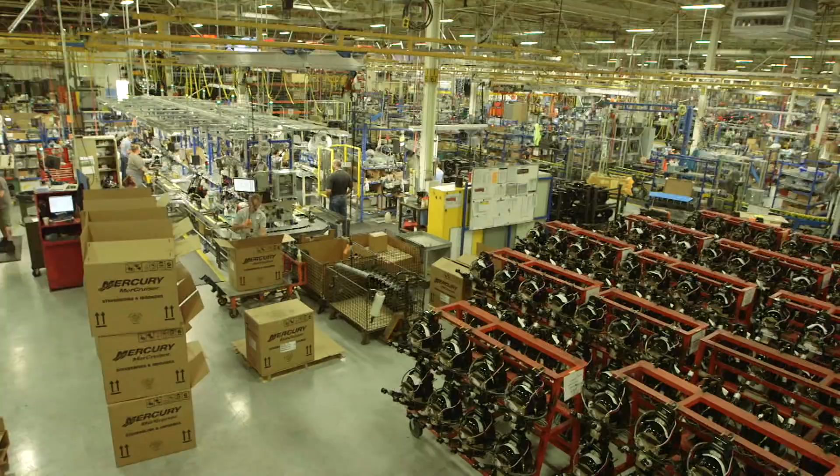This week on Titans, right here in Wisconsin, America. Boom! Mercury Marine.

1939. Just go somewhere and buy it. You don't even realize how it's made. It will help us out a lot in our own shop.

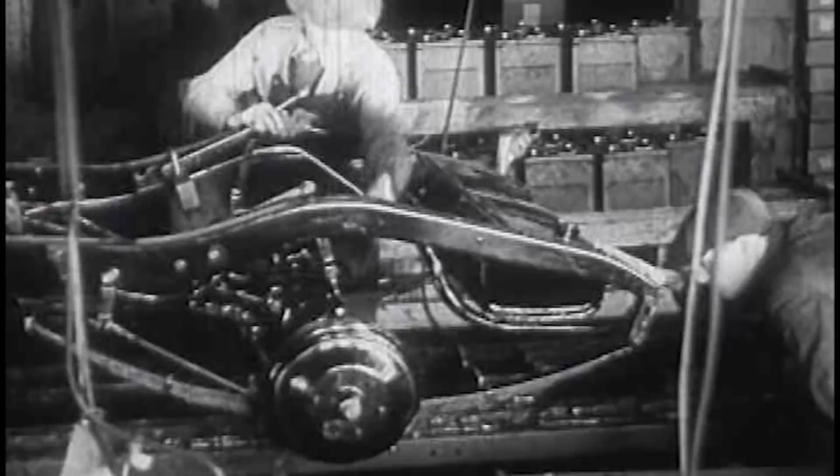I pledge allegiance to the flag of the United States of America. But today, we've seen millions of jobs lost, and 100,000 manufacturing plants have been closed. And to the republic for which it stands. Join us as we take a stand for American manufacturing and fight to bring those jobs back home. One nation, one nation, one nation. Under God, under God, under God, indivisible, with liberty and justice for all.

This industry is hidden from the general public, locked behind closed doors. Today, all of that changes.

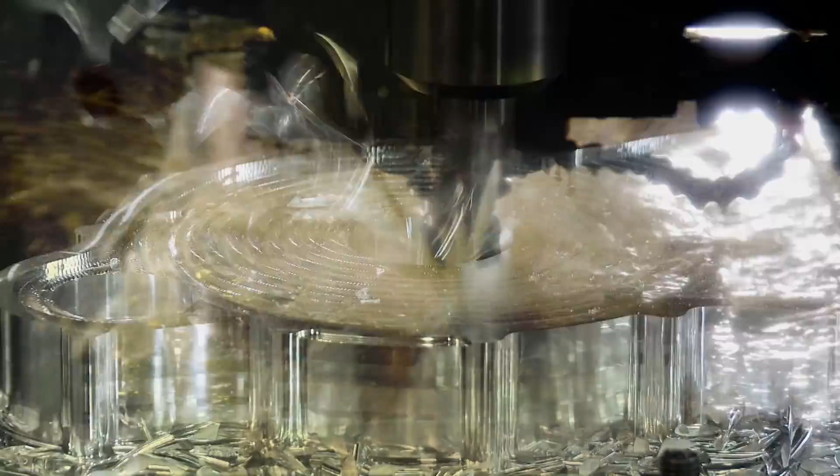Every week on Titans, we're going to show you great American companies that are manufacturing and doing it big right here in America. We're going to teach advanced manufacturing techniques, and we're going to clearly show you how to bring work back to our shores. It's time to put Americans back to work.

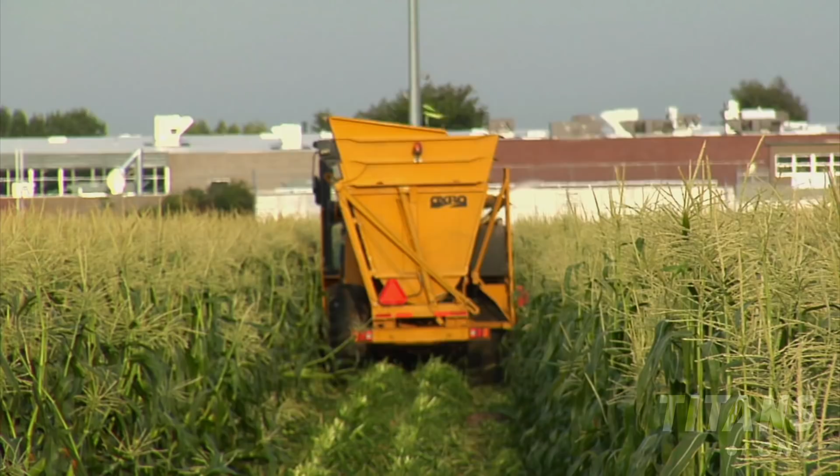We're back. Boom! Right here back in Wisconsin. Last year in the first season, we came down to Eleva-Strum to showcase this amazing high school.

I think that you guys are such a prime example. A small school that doesn't have the funding, so you guys thought outside the box, created a business. It's all about providing the students with a relevant, real-life education, problem-solving, real deadlines, real customers, real concerns, real money.

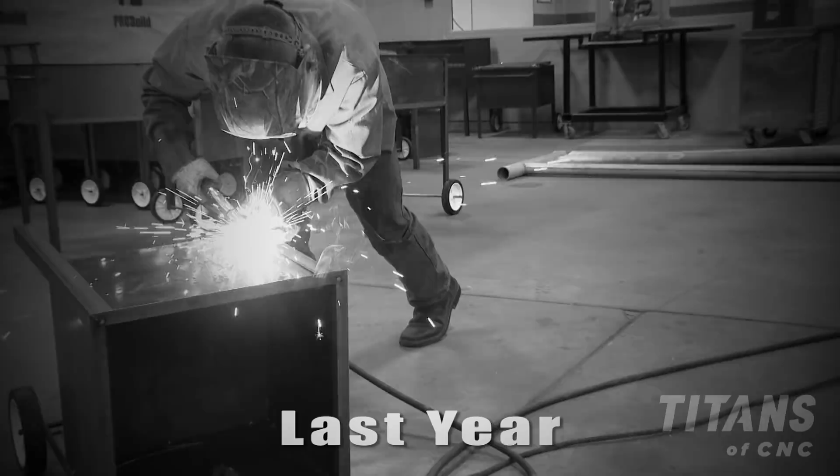These guys are working like they're at a job, but they're getting educated at the same time. They've already got what it takes to make it in the outside world. Eleva-Strum, right here in Wisconsin, in the great United States of America.

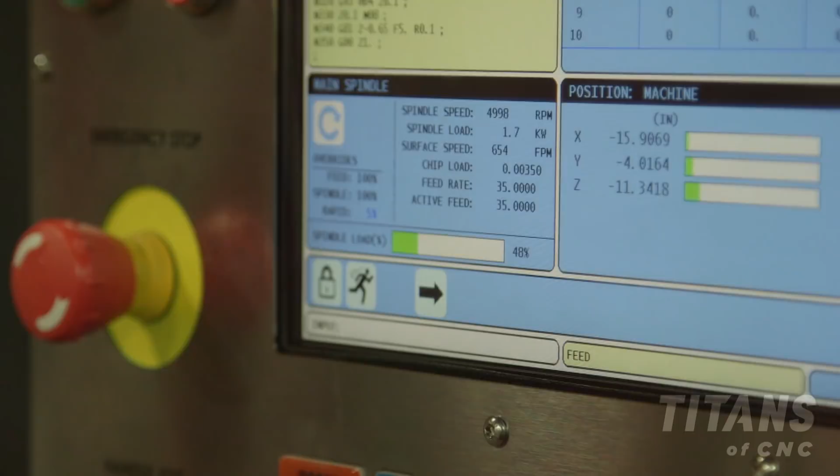And now, during our second season, there's a progression. They got new CNC machines on the floor. So I thought it would be fitting that I would just fly back to Wisconsin.

I would teach them a little bit about those CNC machines, and then we're taking a road trip down to Mercury Marine, 3 million square feet of advanced manufacturing. I'm gonna show the students how we manufacture on a huge level, thus showing the audience that it can happen and that it is happening right here in America. This is gonna be an amazing day.

Craig! Titan! Eleva-Strum! Good to see you, good to have you back. Man, it has been just about a year.

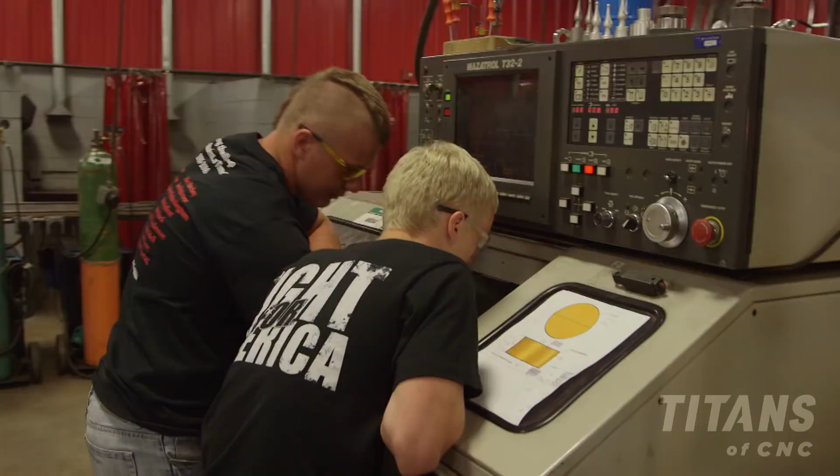Yeah, now you got big old CNC machines. New and improved. Since your show last time, this proton therapy place out of Chicago called us up, so they want us to do some parts. Right today, the students are in here making parts that are going to cure cancer. That's so good. And then we get other phone calls all the time, from schools or industry partners or people that want to implement a program like this into their school.

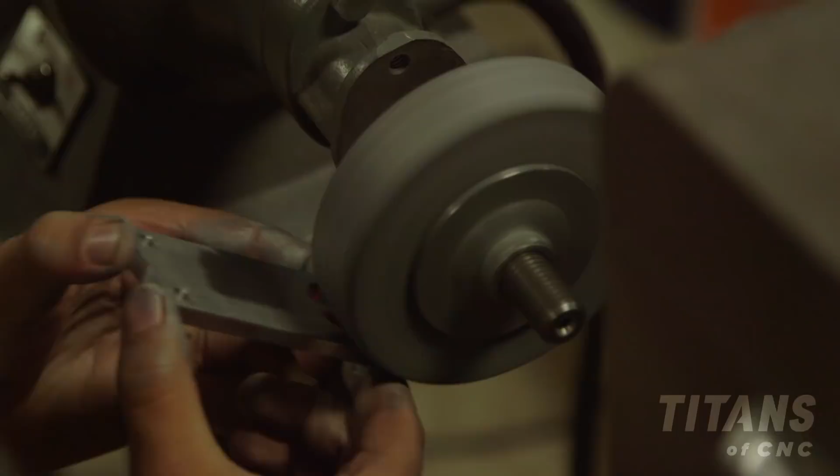So they're starting to call, come up, visit, tour. I got people contacting me all the time, and they want to talk about your school and your students. I'm just proud of you, proud of everything.

And now you got the Haas CNC machine, so we're gonna do a little teaching today, but then we're gonna go bigger. We're gonna put them on a bus, take them down to Mercury Marine, and show them what 3 million square feet of manufacturing looks like.

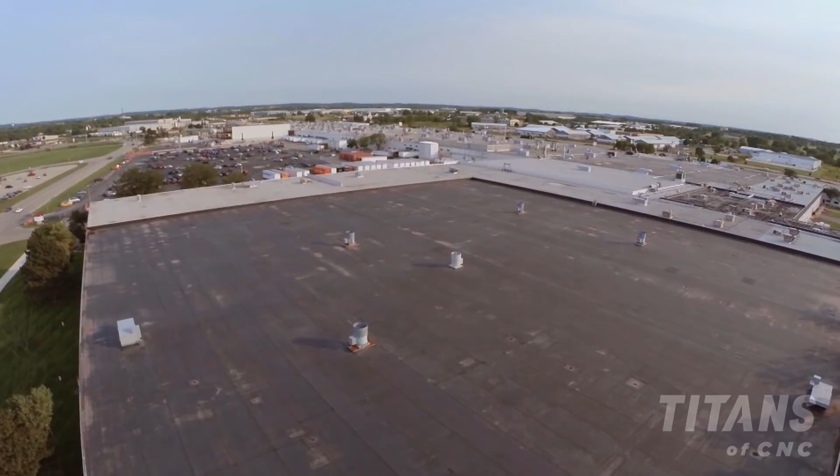That's gonna be awesome. Go meet my cousin and see what he's doing. Show me what's going on, man. Good to see you.

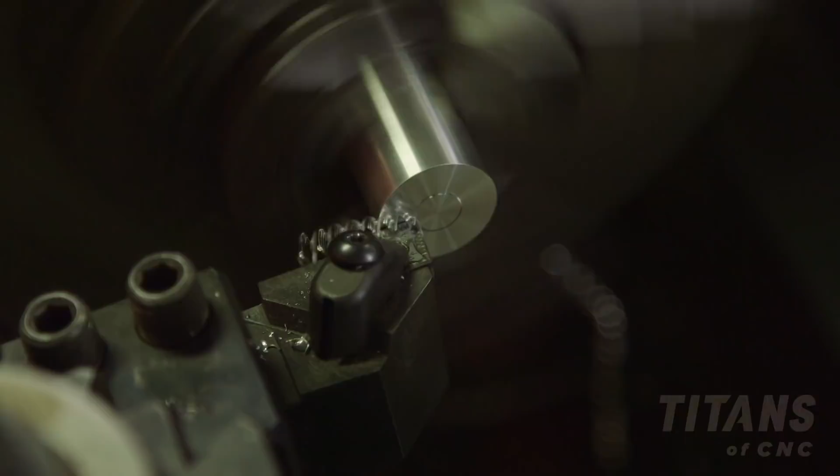Oh, I remember this guy. Hey, Titan, how are you, man? Good, how are you? Manufacturing, making some parts.

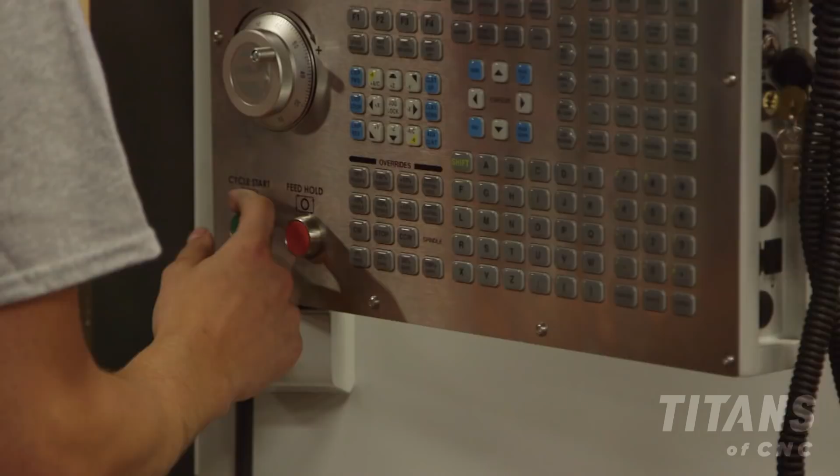Yeah, I've learned a lot since freshman year. I started Cardinal Manufacturing, and I've just progressed from there. So last time I saw you, you were on this exact machine. Yeah, I was. Do you ever get to go over to the CNCs, or how does it work? Yeah, I've been starting to learn on the CNC, but mostly I've been pulled back to here because we're so busy. I'm going to talk to you guys a little bit about the CNCs today, so hopefully I'll expand your mind a little bit to what's possible. Can't wait, right?

Good seeing you. Yeah, thanks for coming.

A lot of people jump into CNCs and they don't really understand the pressure, the tools, and all the fundamentals involved in manufacturing. Because when you come over here and program, you're almost separated from the machine a little bit.

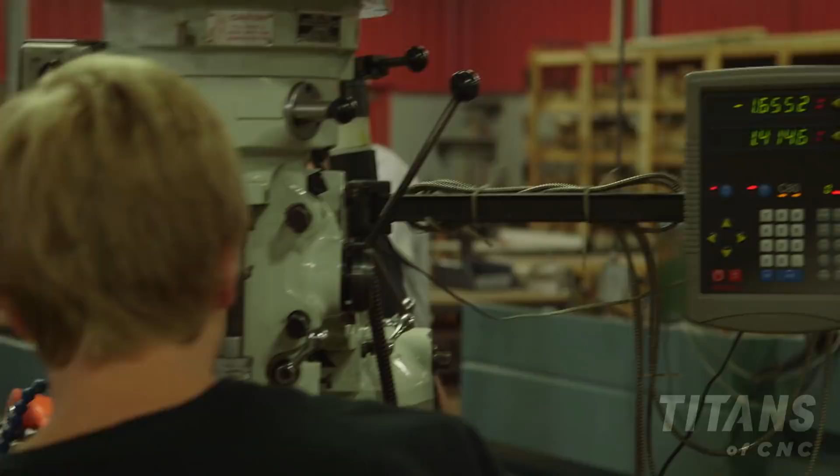Logan, I remember you got the California haircut. You wake up early, like an hour before you start getting ready, just to get that hair dialed? I'm just messing with you. How are you doing, man? Not bad, how are you?

I'm good. So what are you making? Making the pivot points for the grates on the chicken grills. We're gonna drill a 5/8 inch hole through here, and then put another piece of metal through here, and that's gonna pivot the tops and bottoms. Normally there'd be a faster way of doing this, but these grills gotta get done by Labor Day, so Logan's just gonna make a few parts, put a few holes in here, get it done, get them over to welding, put it together. And that's manufacturing.

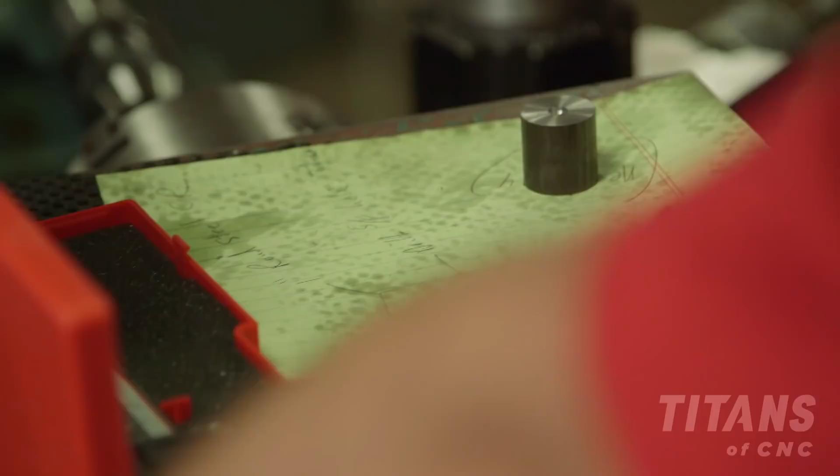We're gonna solve problems right now, get it out the door. American built, get it to our customers, make some chicken. Love it, man, good job.

We put tools in of various lengths. We bring them down and we zero them to the part that you're gonna machine. It doesn't know that there's a part there, it doesn't know that there's a vise there. All it knows is that when you dropped it down, it says -12 inches.

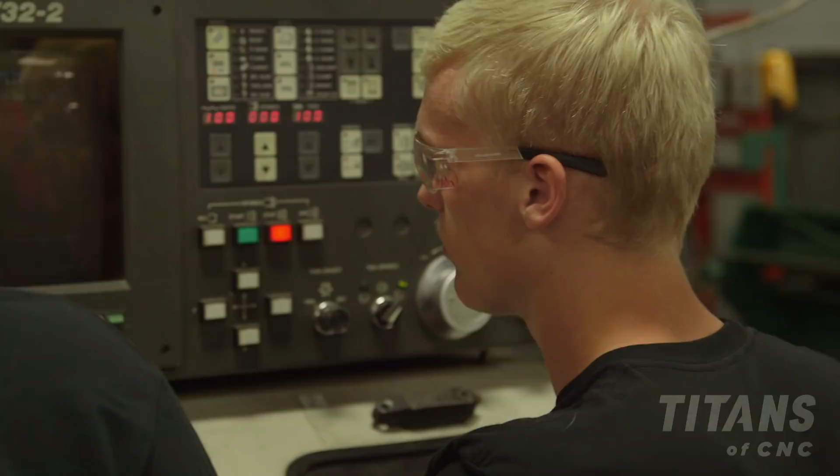What's up, guys? Good to see you again. How's it going? Oh, I love that shirt. Representing. You see that? Titan American built. Boom, oh, that's the part right there.

Since your show last time, this proton therapy place out of Chicago called us up, so they want us to do some parts. That is awesome. So you guys actually faced the first side, cut your jaws, flipped it over, now you're just decking the backside.

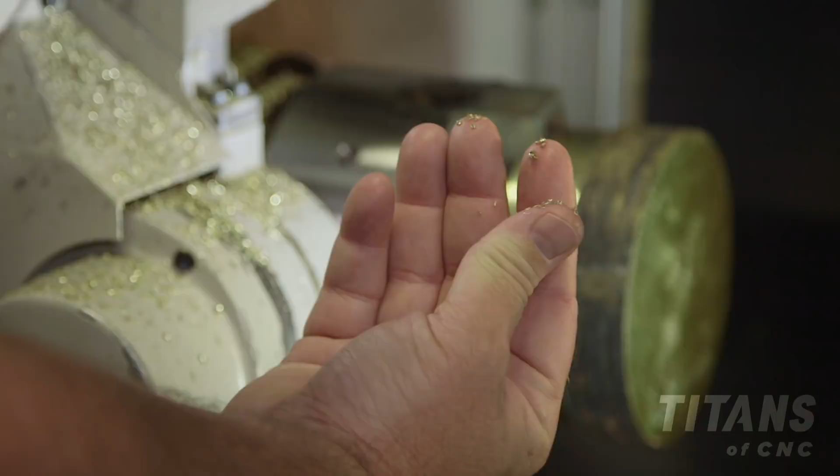So what is this, 360 brass? Yeah. They just send us the parts out of Chicago, they send the material up. We're machining, we're going to ship them back to them. This is the first time through, so we're just doing a short run of 5 parts.

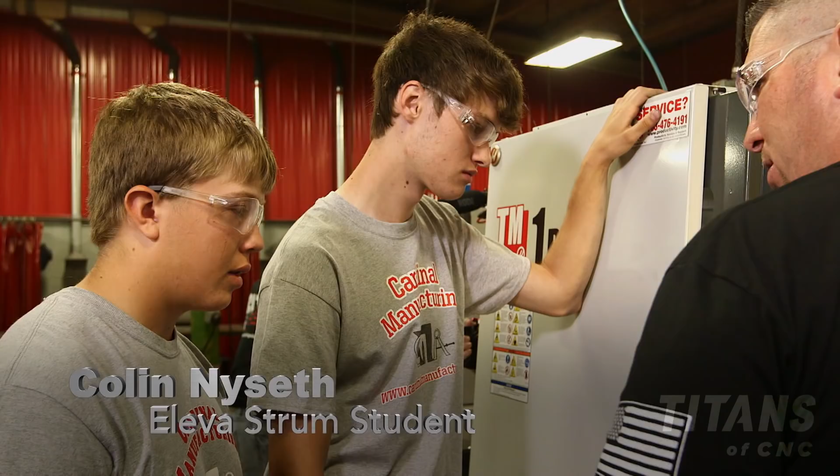Great job, guys. So I've been hanging out with Titan today, and he showed me that just by adjusting a few speeds and feeds, you can make your program go way smoother and faster. We just made a couple changes, speeds and feeds, how the approach was, and you got it down to 53, 54 seconds, right?

Yeah, it's kind of scary the first time watching it zip across there at a feed rate of 35, but after you see it go the first time and see that the tooling can actually handle it, it's really cool to think that we just took a minute off the program. And that just opened your mind to the possibilities, right? It's awesome.

I love it. I use Inventor HSM, and I just learned the drawing part of it last semester, and this semester I look forward to learning the cam part, so that way I can draw the parts, put them in cam, and then send it out to the machine.

There's a lot of different codes and stuff, but you should master it. You should have a cheat sheet of codes that are necessary, the necessary codes to memorize and be tested on before you touch one of these machines.

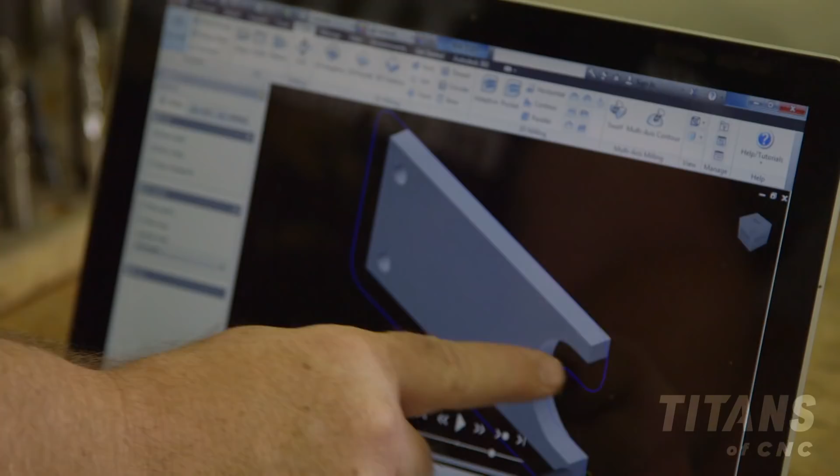All right, we just finished up over here at Eleva-Strum High School, and it was awesome. I got to talk to the kids, we worked on the CNCs, we worked on some CAD CAM, and now we're getting on a bus. We're gonna take a 3-hour drive down to Mercury Marine. Come on, it's gonna be awesome.

You guys ready to go? Ready. Come on, let's do this.

Next on Titan: 3 million square feet. I never would have thought machining was like this. Thousands of people coming to work every day.

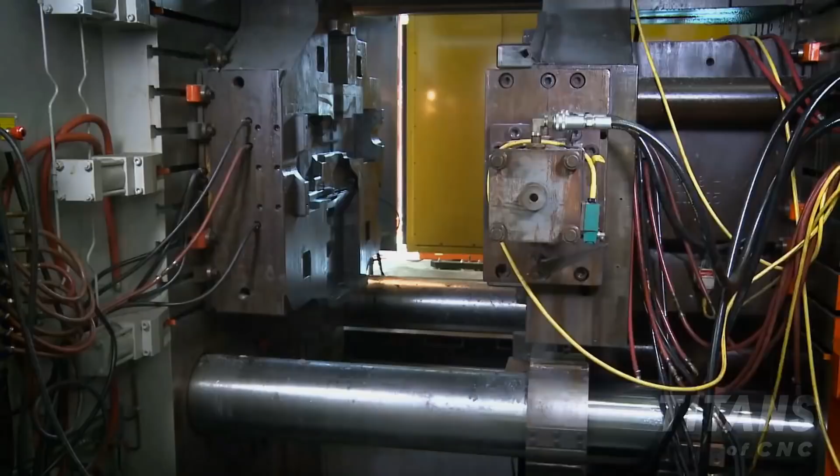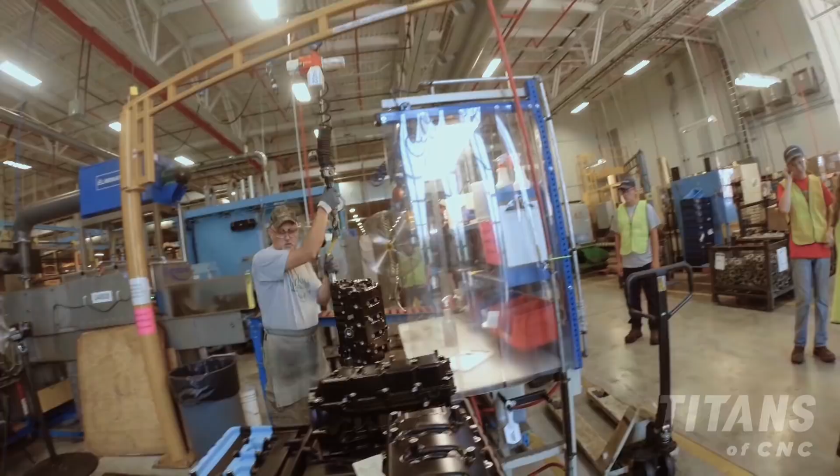We are here at Mercury Marine, Wisconsin. This is an amazing company, started way back in the 1930s. They have 5,300 employees and close to 3 million square feet of advanced manufacturing happening right here. We brought the students from Eleva-Strum down here to open their minds. Sometimes in life, seeing is believing. This is gonna be awesome. Let's go check it out.

Hi, I'm Jerry Sigelski. I've been with Mercury Marine now for about 10 years. Hey, good to see you. Welcome to Mercury. I started in the quality field in the machining area. Currently, I'm the general manager for the machining plants here in Fond du Lac, Wisconsin. Jerry. Titan. How are you? Good to see you. Great seeing you.

Hey, thank you so much for taking the time out of your busy day and helping to educate our students, the future of American manufacturing, the future of this great country, and just showing them what high-end manufacturing is all about. Hey, that's not a problem. We've been really looking forward to it, really excited about their program. We need young talent and young people in our workforce to take on the legacy that we've already created. Absolutely. So you guys have like 5,300 employees. 5,300 around the world, 3,100 of them are here in Fond du Lac, Wisconsin.

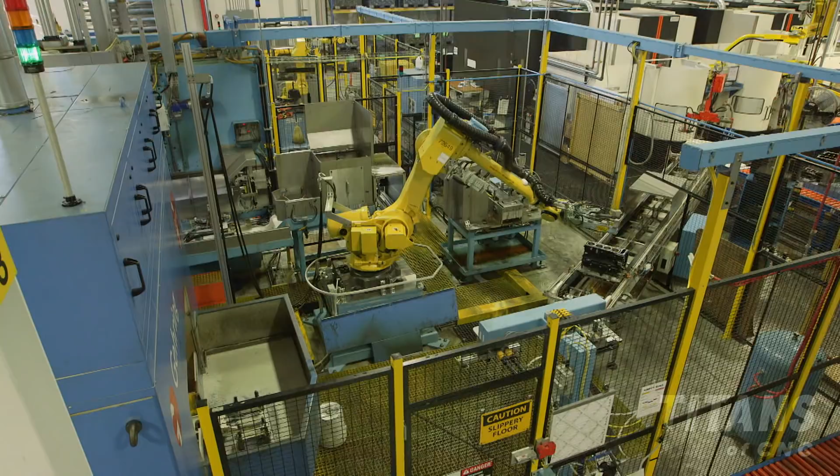Well, Jerry, this place is amazing. I know your automation, your machining, everything is on a huge level. You do everything in-house, and it's exciting. Our technical capabilities are second to none. I'm really excited to show you guys what we have to offer, so let's go take a look. It's gonna be awesome. I can't wait. You guys ready? Yeah! Yeah, let's do this.

We're in the midst of some pretty exciting times within manufacturing. Innovation has never been at a higher level. Bringing these kids in from Eleva-Strum is absolutely critical to our future and our future success, not only here in this area, but around the world.

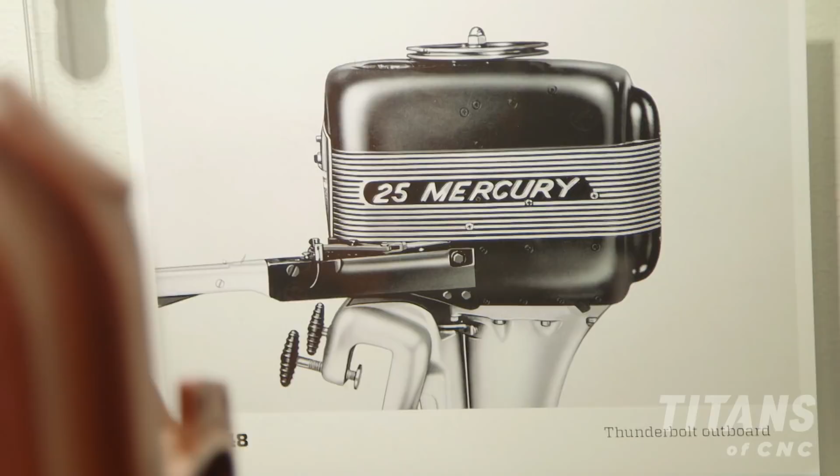Titan, I'd like to welcome you to Heritage Hall, a very special place for Mercury Marine. We have a pretty cool story to tell here in Fond du Lac, and I think this place really sums it all up. This really outlines the diversity of Mercury over the last 75 years that we've been in existence. That's crazy. 1939, the Thor. That's right. Love the name. And as you can see, as we go through our product family, the diversity that Mercury's brought to Fond du Lac in the area with chainsaws and other products, snowmobiles throughout the years has been outstanding.

So you guys really pay attention. When you look at the motors on the sides, look at where they started, and as years progress, how the technology changed, the design changed, it just gets better and better. Ooh, the big boys. Now we're into the super size. Yeah, so as you can see, the first 30 years, evolution and innovation seem to be very slow. However, the last 30 or 40 years, technology and innovation is growing at a rapid pace.

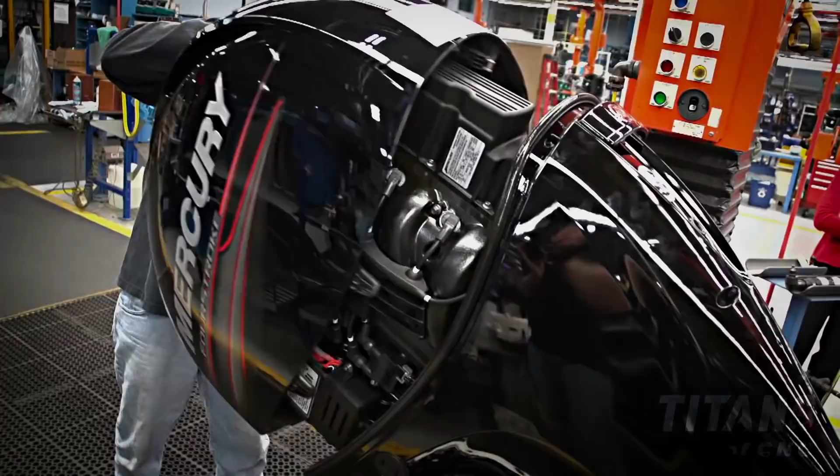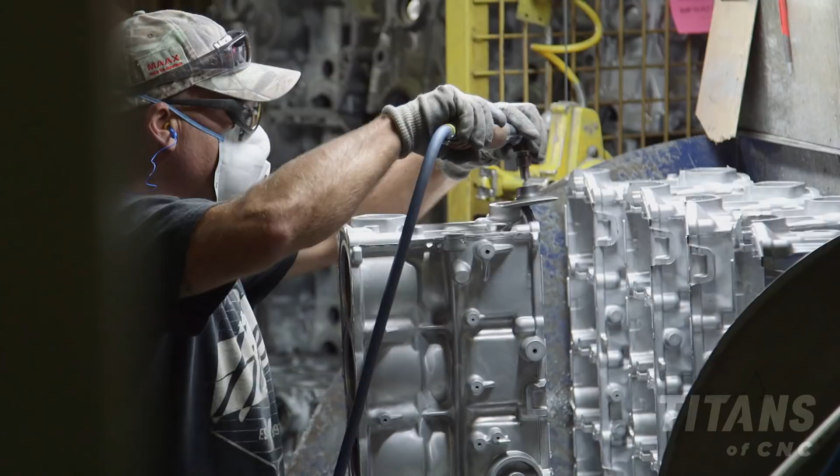So now that you've seen some of the end product, I'm gonna send you over to the foundry to meet Mike and Trevor. They're gonna take you from aluminum chips all the way to a finished product, and then we'll come in and see how it's done through the rest of the process. Machining, assembly, the whole works, right here in Wisconsin. Works of art being made. Absolutely. It's gonna be exciting. You guys ready? Yeah! Oh, boom! Yee! Let's go.

He has the tools, the equipment, and the know-how.

Trevor! Titan! Hey, it's great to see you. Likewise. Thank you very much for taking time out of your day to help educate the future of America on American manufacturing. Well, welcome to Mercury Marine's Plant 17. Plant 17, we are our own foundry.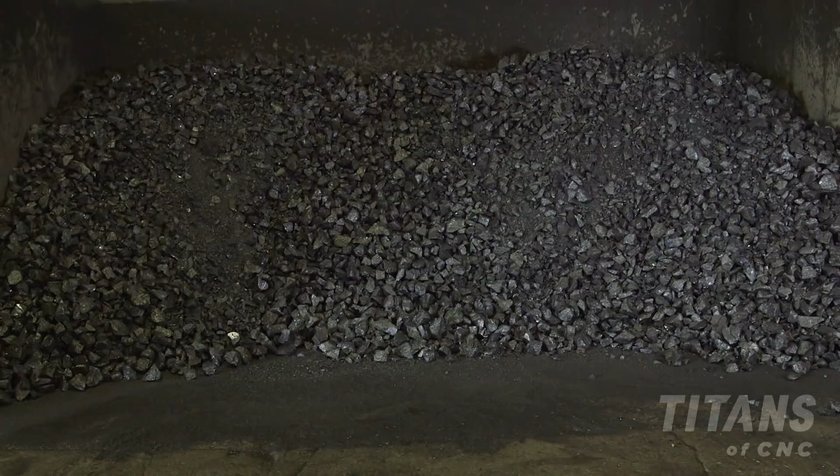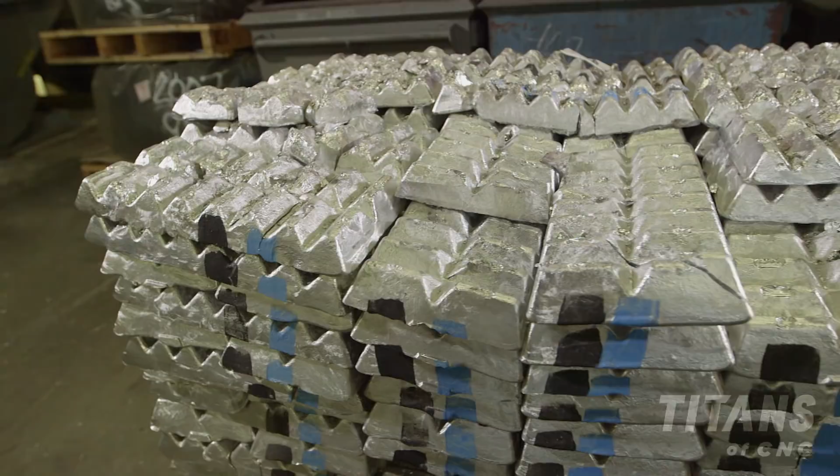We process a lot of scrap. So I see so many different types. So you got just regular like shaving chips over here, then you have chunks. Is this aluminum or what is this right here? This is silicon. Silicon. Okay. Our alloy has got a higher silicon content, so when we bring in scrap, that is the only raw material that we really use to make our alloys. So you got these huge furnaces over here. You just take big chunks and just like making cookies, you add in all the ingredients. You're exactly right. It is a recipe.

We take a little bit of this, a little bit of that, put it into our furnace, it gets molten, and we take a chemistry sample. Based off the results of that sample, we might need to add a little bit more. So we're constantly making sure we've got the right end product for our customer before we ship it out.

That's awesome. Who does the taste test? I'm just playing. We got a little machine that does that.

What do you guys think? Anybody got any questions? Trevor, how many pounds of metal do you melt down in a year?

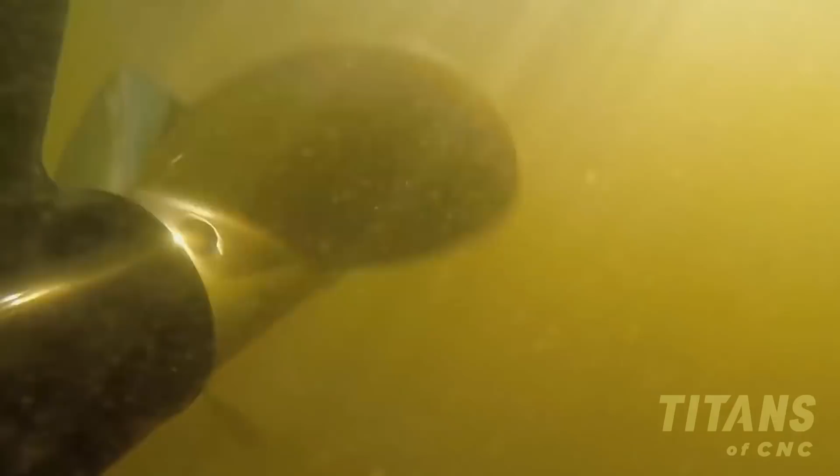Next on Titan. If you just go somewhere and buy it, you don't even realize how it's made. These are 700 pounds. I've been to dark places in my life.

Anybody got any questions? Trevor, how many pounds of metal do you melt down in a year? We melt about 40 million pounds annually. 40 million pounds, that's awesome.

We support other companies around the area that bring us that material. I love it because a lot of scrap goes over to China for them to use to build products for us, but you guys are keeping it right here in Wisconsin. We are keeping it right here. USA, USA, boom, I love it.

My name is Val Zemke. I've worked at Mercury for 43 years. I feel like I've been very blessed, very lucky to work for Mercury. I've raised a family, I have a wife, 2 kids, 3 grandchildren. I take a whole lot of pride in my job, in my area, and I believe that's just the American way. One more year and I'm retiring. How's that? Thank you, Mercury Marine.

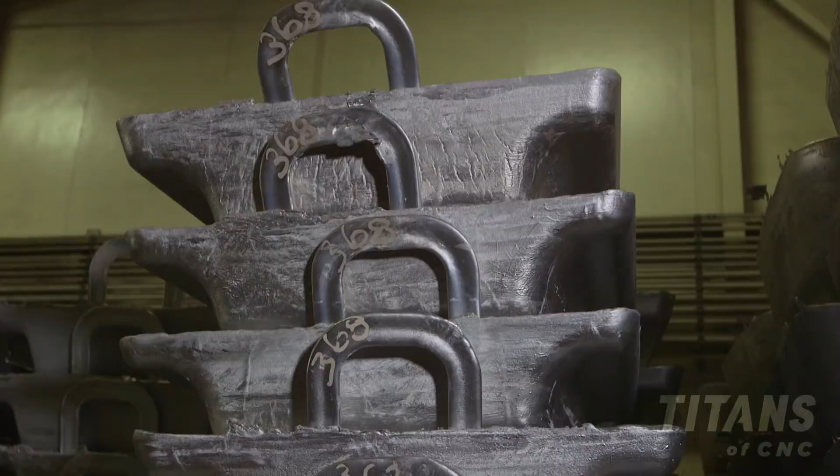Each one of these is either 700 pounds or 1,200 pounds, made to the alloy we need for our customer. So did you guys hear that? These are 700 pounds and 1,200 pounds. They made this metal and formed it right here at Mercury.

Then they're taking it, lifting it up, putting it into the furnace. The molten metal comes out and forms into die castings. Then they machine it, assemble it with other parts, and ship it out across the world. Pretty awesome, huh? Yeah, so good. That is so great, man. Yes, it is, Titan. Cool, man.

Hi, my name is Mike Meyer, and I've been with Mercury Marine for 21 years. I started my career on 3rd shift as a production employee, and now I have responsibility for our foundry operation here in Fond du Lac, Wisconsin.

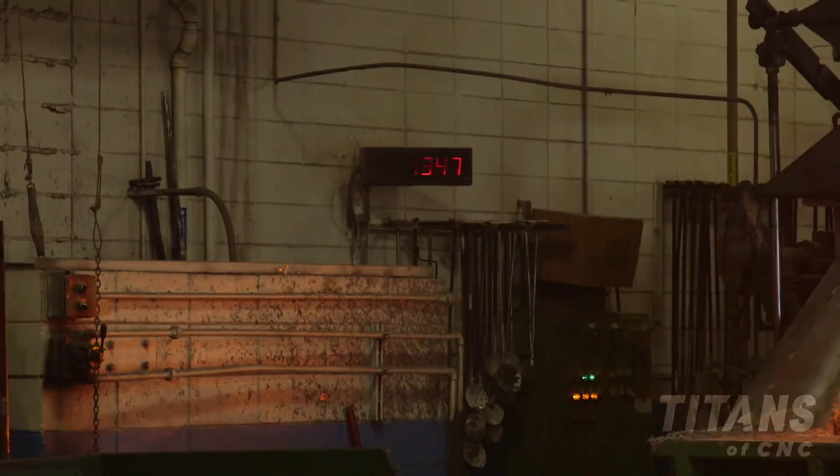Mercury Marine's a great place to work. Our production employees get to utilize their talents on the floor every day, and there's tremendous opportunity for all of us. If you have the drive, the will, the passion to succeed, and you put your mind to it, Mercury Marine is a place where you can advance.

So when I first came here, I didn't really know what to expect. I thought it was amazing how they took recycled metal and melted it to 1,400 degrees, and then used that for all of their parts, right here in America.

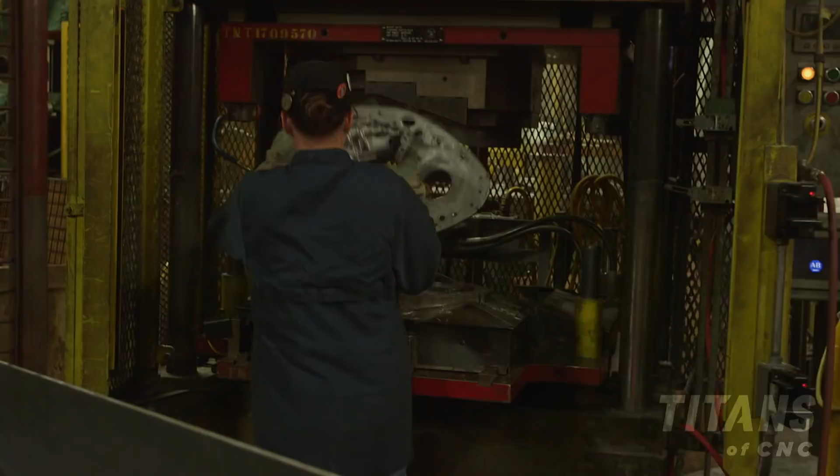I see you have women working on the line. Yeah, you guys employ a lot of women? We do, quite frankly, and our workforce has continued to become more dynamic. We're truly about making an experience for any employee that wants to come work for us. I find that women are very meticulous. They're perfectionists and they really do a great job. Their machines, they refer to them as their machines. And manufacturing is a great paying job for men and women.

Absolutely, that's awesome, man. Our high pressure casting cells are where we make our casting. It's the creation of the start of the motor, where we're using robotics to robotically spray and ladle the metal into the tools, where we use robotics to insert cylinder liners, extract casting, and perform multiple operations.

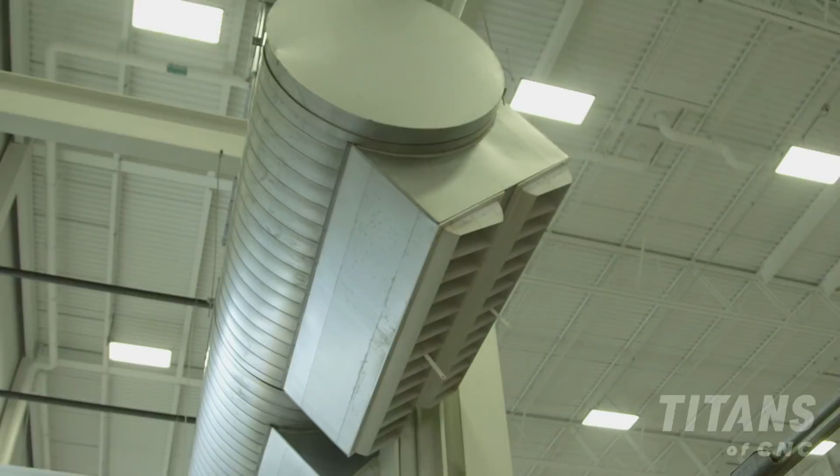So this is our new die cast wing that we put up about 2 years ago, where we continue to invest not only in new technology, but in the comfort of our employees. You'll notice there are natural lights, and we have direct air that blows on the employees, keeping it very comfortable and cool. So this really has been an environment where employees are almost to the point where they're fighting us, saying, hey, I want to work out here.

This is like the future of die casting. Absolutely, it's awesome, it's very light. Absolutely. When I'm at my house thinking about machining and manufacturing, I think it's just like big, dirty buildings with dark lighting, and it kind of sounds scary.

I wouldn't really want to do that, but when Titan took us out here and showed us this building, it just opened my eyes to this new world. I never would have thought machining was like this. It's way different, and I think I could really see myself doing something like this in my future. Power to do the thing you really want.

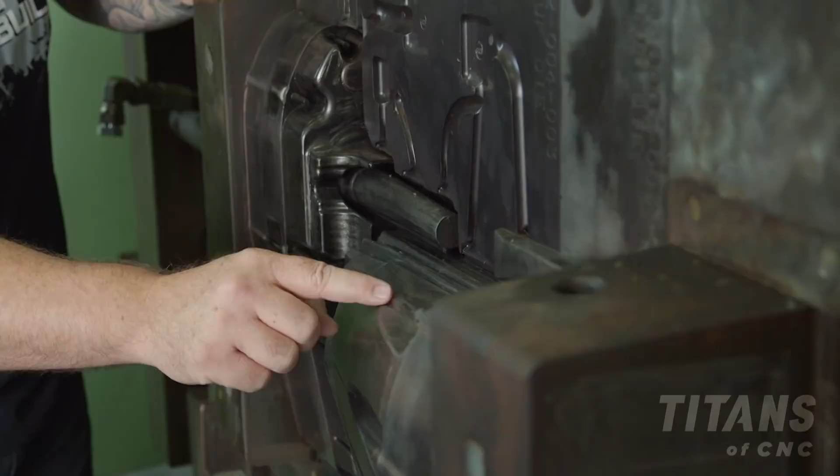So this is our new die cast wing that we put up about 2 years ago. You guys have CNC machines now. They actually take these huge chunks of metal and CNC machine the parts right into the metal, on the outside shape, and they do it on both sides, close it up, and then put the metal into it. That process is happening right here.

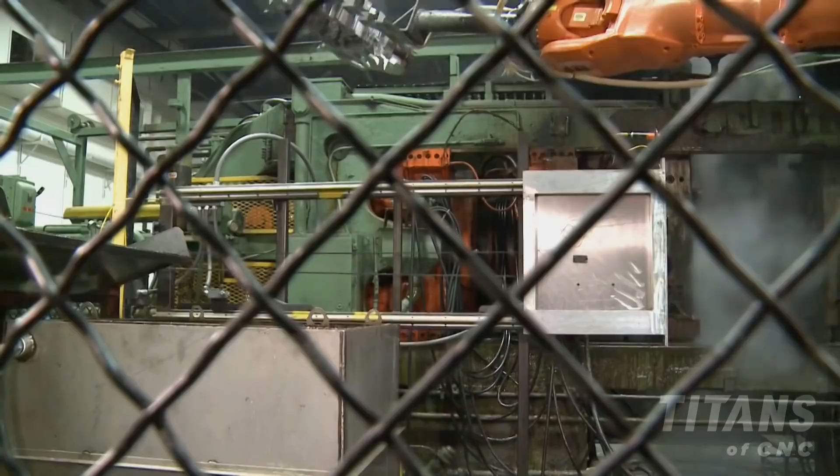The molten metal is dropping in here, and within 15 to 30 seconds it hardens enough where it opens up, the robot grabs it, puts it on the conveyor belt where they take it off and knock off all the trimmings and stuff and put it in the cart to take it over to get finished. You can make anything.

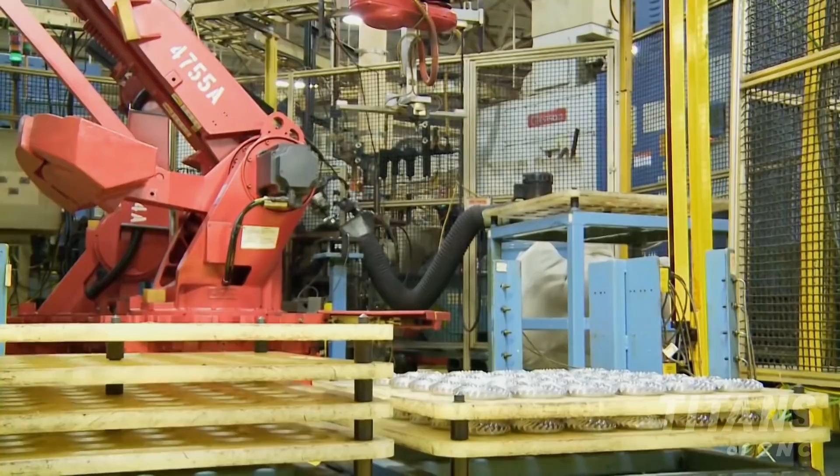Manufacturing - a lot of people don't see the skill in it, but it is absolute skill. It's creativity. When you're building all these tools, that is an art. And when you can figure out how to solve problems and put it all together, that's when you're efficient and that's when you're making money. And that is what built this country - that problem solving, that innovation.

The tooling has to be perfect. Tools can cost upwards of $1 million. So all the design time, all the simulation time, everything we do up front drives it to make the perfect tooling. Once the design's done and the engineers approve it, it comes out to the floor and we start making parts.

So I want you guys to see the relationship with CNC machining. Manufacturing - there's so many different types, from casting to sheet metal to CNC to assembly, and they all relate to each other. It starts with very high-level programming. So this piece of steel right here has been fully 3D machined with a CAD/CAM system.

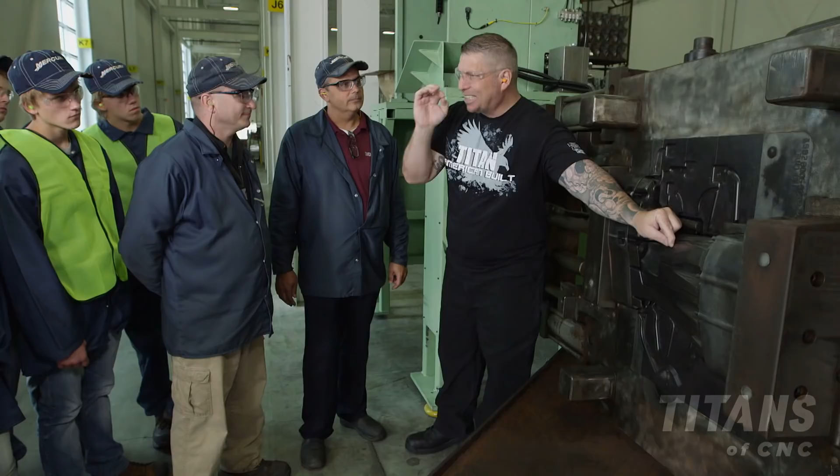It's awesome. And if you had one blemish, one tiny blemish, every single part you put on here would have that exact blemish. So it has to be perfect.

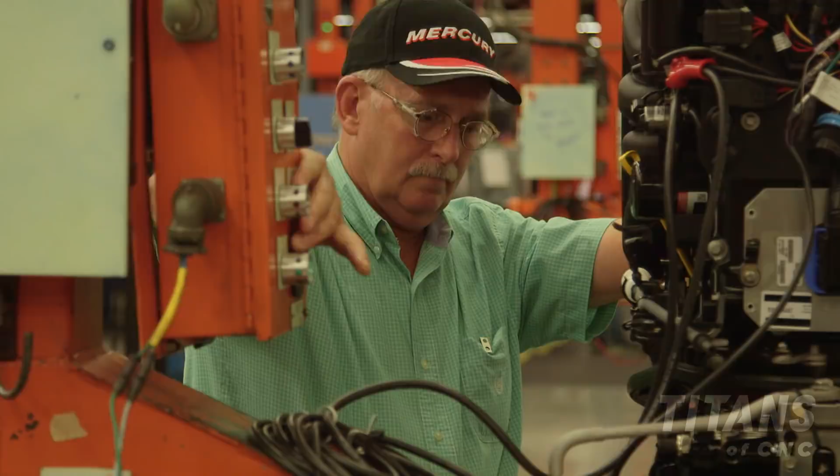I know that manufacturing can be strong right here in America. I think we're proof of that. We've got thousands of people coming to work every day, doing their best to make the best product we can and get it to our customer on time and of the best quality.

So does anybody have any questions? You can mold plastic too - is it the same process? Absolutely, the design of the tools for plastic are no different than for aluminum. In fact, we have a plastics foundry in St. Cloud, Florida. So you guys mold plastic, aluminum, do everything? We do everything right here in Wisconsin.

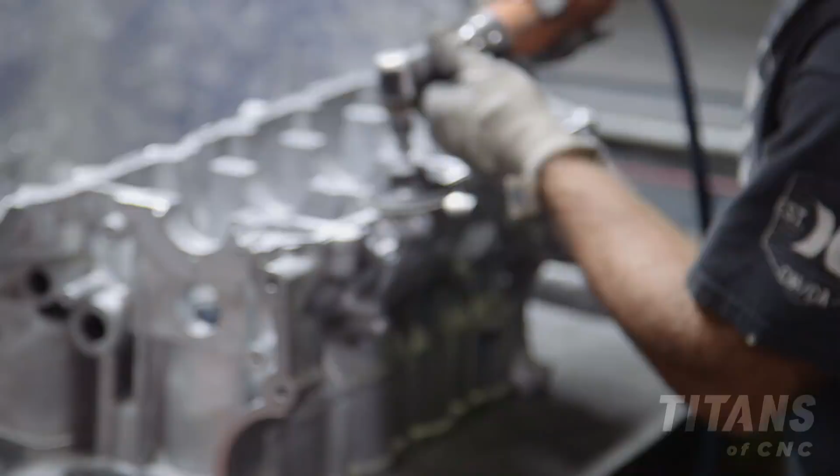Mercury Marine - Mike is just showing Titan and the students the casting process. Now we're going to take it on to the next step, which is a short process on trimming the part and getting it ready for machining. So now you're seeing the trim work. It went through the bead blaster, and now it's ready to go to machining.

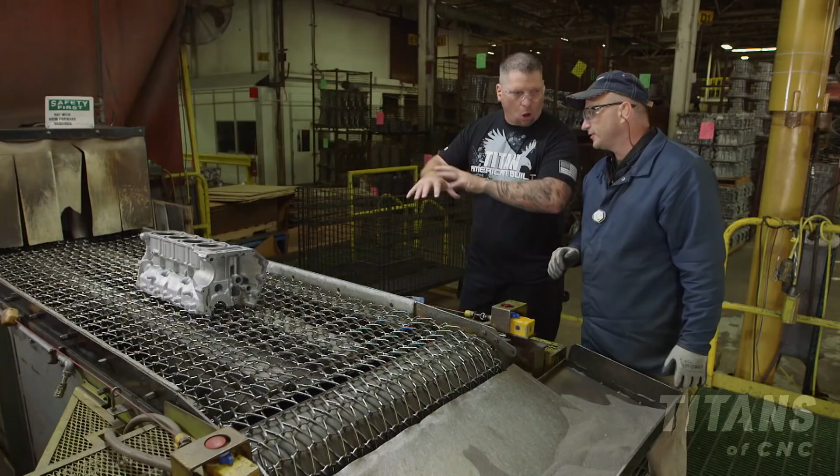So now it's all finished, all uniform, looks beautiful. Yep, it's ready to go to the next process. And now the real process - the CNC precision machining. Can't wait.

So once you fill up this basket, you're just gonna pick this up, take it to the machine shop, and this is gonna let it run. Correct, the tow motor will come up and take it to the machine shop. Awesome - we are done with it in this plant then. We're at Mercury Marine, and these guys are doing it right here in America, doing it big.

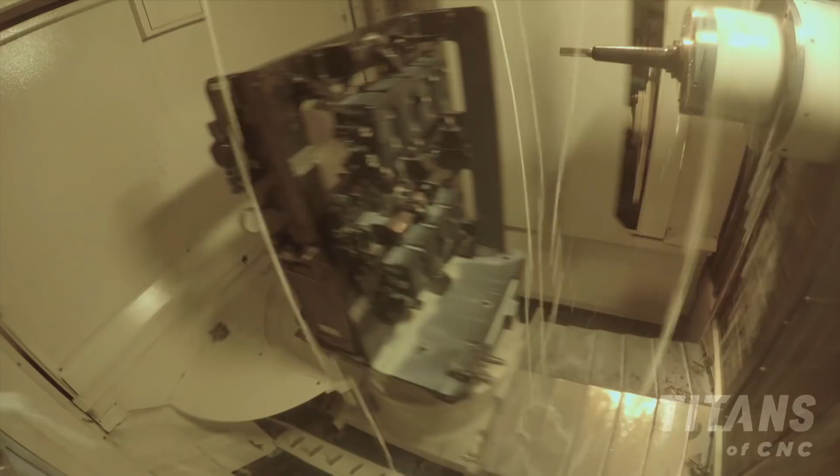Next on Titan: the size of the machines just blew me away. Oh, nice to meet you, man. Is that big old robot over there that I'm looking at?

Once the engine is finished, it's staged in a truck and shipped to a huge warehouse, about 90,000 square feet, where it can be picked and shipped anywhere in the world.

Overall, it was just an amazing experience. It's not once in a lifetime you get to do this. Just the chance to be here with Titan and all of his family members, I guess you could call them. They're like family members to me after 3 days of knowing you guys. Jerry, thank you so much, man. No problem, that was awesome. I hope you enjoyed the visit. Oh, I really enjoyed it.

Did you guys enjoy this? Yeah! American manufacturing on a huge level right here at Mercury Marine in Wisconsin, USA.

I love it. We just want to thank Titan for taking his time. We really appreciate him coming down and spending time with my students, and then my cousin Jerry down here at Mercury Marine, bringing us in and letting us go through his plant, spending time with us. It's been a great experience for myself and for the students, and to share this with the country is going to be an excellent experience.

You bet. Safe travels. Amazing facility, 3 million square feet. It's just unbelievable, you don't even think about how big that is. Just the machines, the architecture, how things are made, how things are disassembled, assembled, painted, processed, and sent out. It's just amazing. You don't even think about that stuff. You just go somewhere and buy it, you don't even realize how it's made.

Right here in Wisconsin, America. Boom! Drop the mic and walk away.

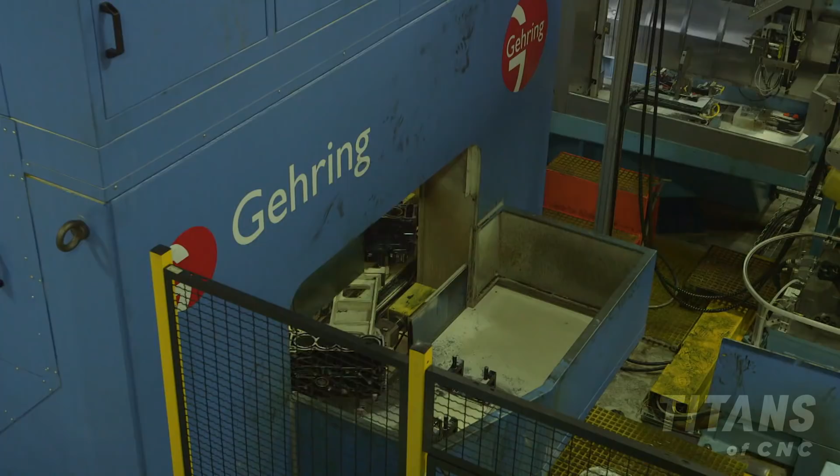So Titan, now that the block's been machined, we have to make sure it hits the precise quality criteria we need. Now we're going into the CMM lab where we have state-of-the-art equipment. It has temperature control so we maintain the accuracy of our inspections and the integrity of the part.

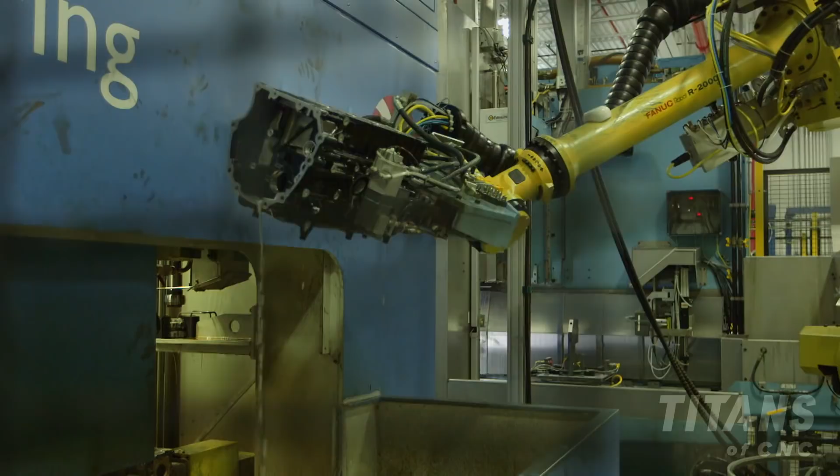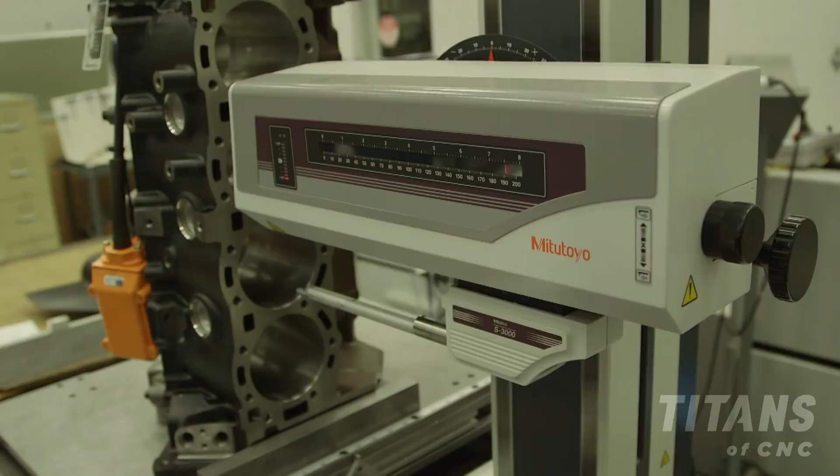So here we are, our CMM inspection lab. Man, you've got some huge CMMs in here. This lab actually works three shifts, so if manufacturing and machining is running, these guys are here. All three shifts, we execute about 2,000 CMM programs a week, meaning we're checking about 2,000 components per week. One of the blocks we were looking at is on the machine over there. Should we go have a look at it? Yeah, that'd be awesome, come on guys.

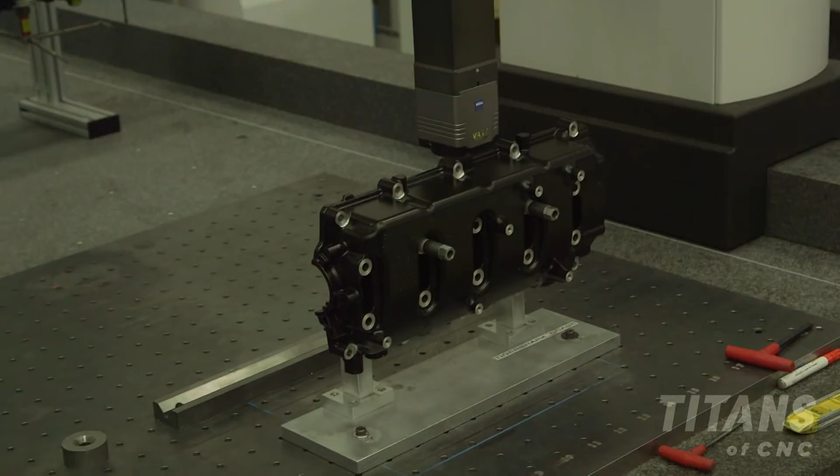We deploy two different styles of inspection equipment. This is what you call a touch probe, a bit older technology, it goes in and hits multiple points, still very accurate. On the other side of the room, we do full contact scanning, much quicker, a newer process, more reliable, more precise, much faster. It does full 3D scanning across the whole part, sweeping the bore so you can tell how bores are aligned to one another. We use that on certain parts where we need that level of accuracy, but this accuracy is more than adequate for a block like this.

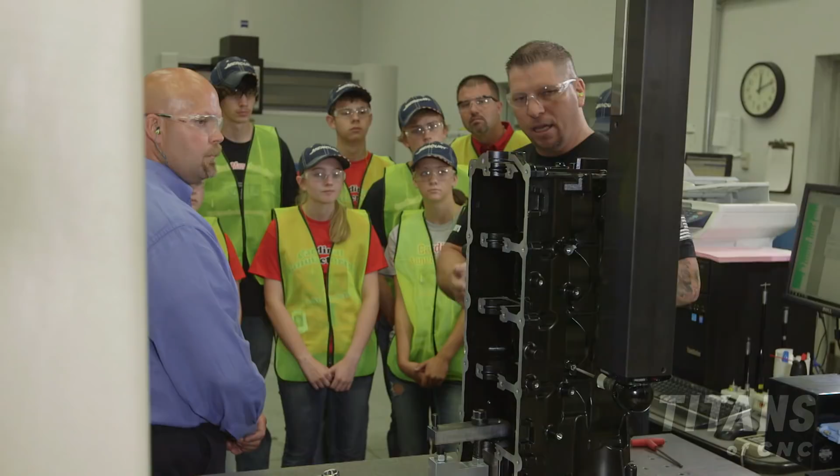So Jerry, when you guys are doing your line boring, that's a precise art. What kind of tolerances are you dealing with? Probably on diameter, about 12 ten-thousandths. So if you take a human hair and divide it by three, that's about where you're at. The average human hair — take mine, you're in trouble. Exactly, it's not there. I've talked to you guys about solving problems in the manufacturing process — you solve everybody's problems downstream by dialing in your inspection processes. Then when the part travels through assembly and gets all the other pieces, it's going to be dialed in.

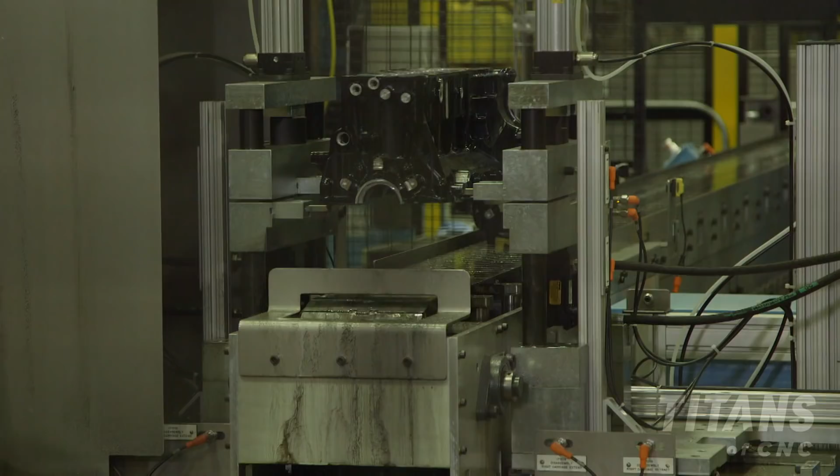So once we know our parts are perfect, they're delivered to assembly. In the assembly operation, they have a very, very automated line that takes all those components — we put pistons in the cylinder block, the crankshaft — and we marry all those components together into an outboard engine.

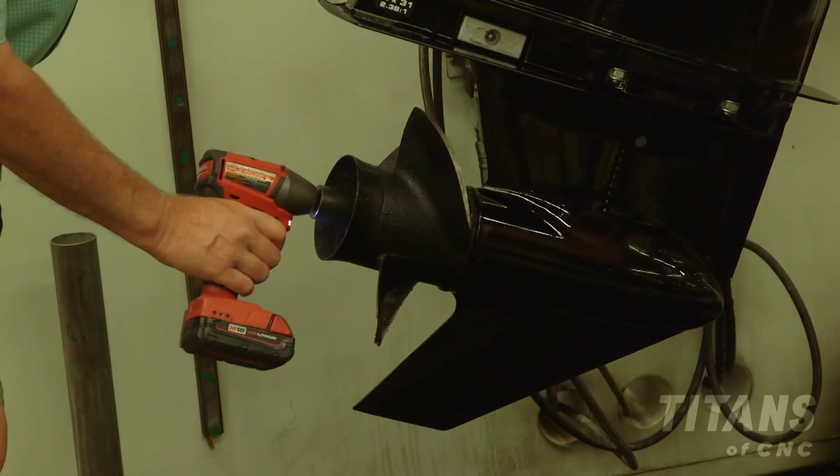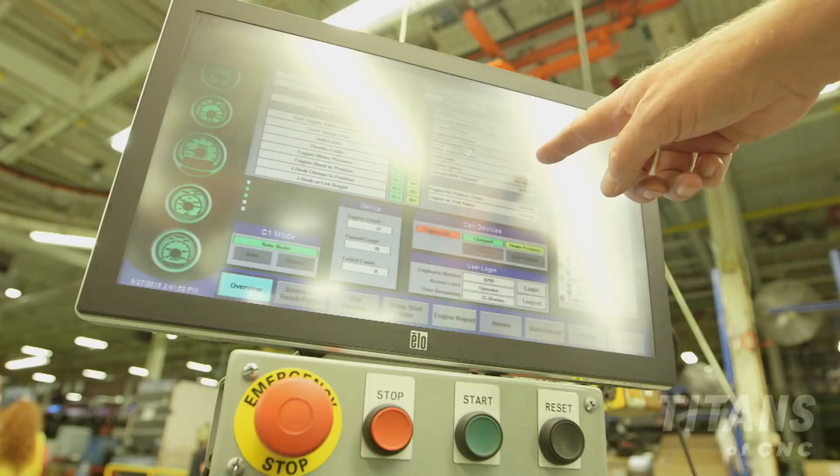Every engine goes through a hot test process. That process is a multifaceted test that checks a lot of different criteria to make sure the engine is functional and ready for use at the end customer. Once that engine is through the test process, we put the finishing touches on, make sure it's clean, and place it on its own custom pallet to ensure there's no damage throughout the distribution process.

Once the engine is finished, it's staged in a truck and shipped to a huge warehouse, about 90,000 square feet, where it can be picked and shipped anywhere in the world.

This experience coming to Mercury Marine was such a big learning opportunity for all of us, and I think it will help us out a lot in our own shop. I am so happy that we got to be here this trip with Titan and his crew, and Jerry and all the staff at Mercury Marine, and I'm glad that they taught us everything that they did, because now we will take it back to Cardinal.

Next on Titan — overall, it was just an amazing experience. I feel it's important to give back. We need to wipe the slate clean.

So now we've seen bare, raw scrap aluminum get melted down, casted, and go through the deburring and bead blast process. Now we're ready to go to the machine shop.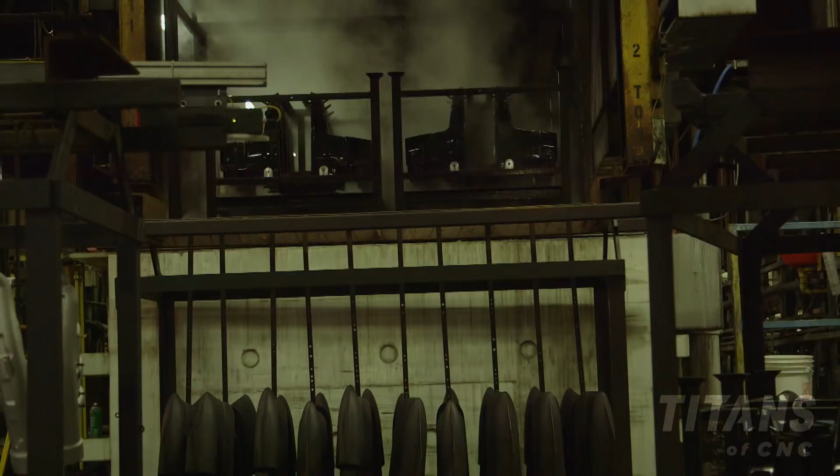The parts just arrived from our die-cast facility. Before we can machine them in the CNC plant, we have to put them through a special paint process, a dip process with a series of cleaning steps, then a primer process. The parts are loaded on a conveyor, and after a 4-hour cycle the part comes out black, primer coated, ready for machining. It's very important that we have robust corrosion protection on our parts, being in the marine industry.

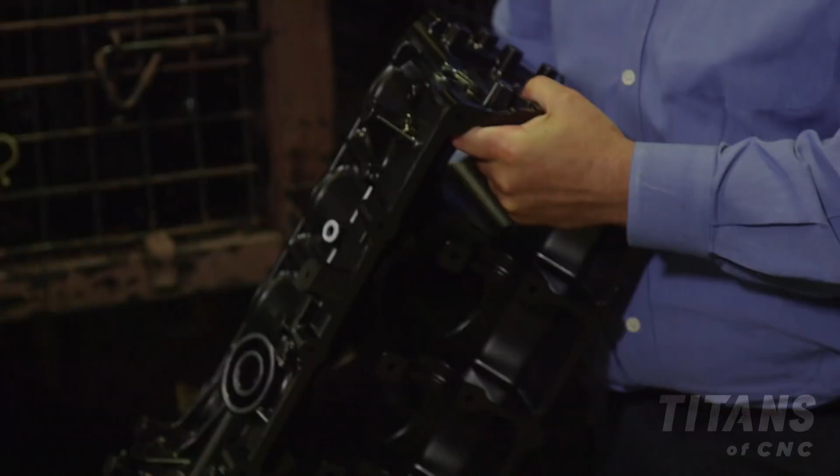And now we have a part that is fully primered and ready for CNC machining.

So this is our CNC machining area. This part is ready to go and get hooked right onto that pallet. That came from our paint process, the primer process we looked at earlier. This cell consists of 6 machines, 24 pallets, operating 3 shifts a day. We make roughly 160 blocks per day in this cell alone, and it's still not enough, so we're adding 2 more machines for additional capacity.

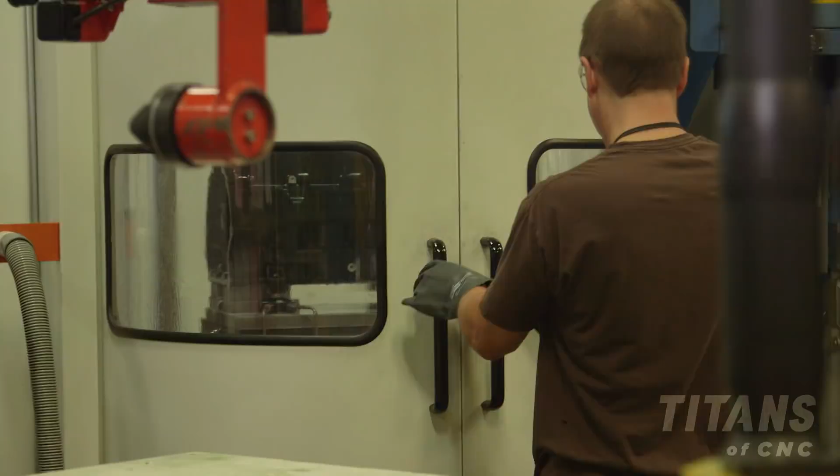With our flexibility and advanced automation, we're able to keep Americans working right here in Fond du Lac and be competitive in a global market. Have you guys ever seen a pallet system like this?

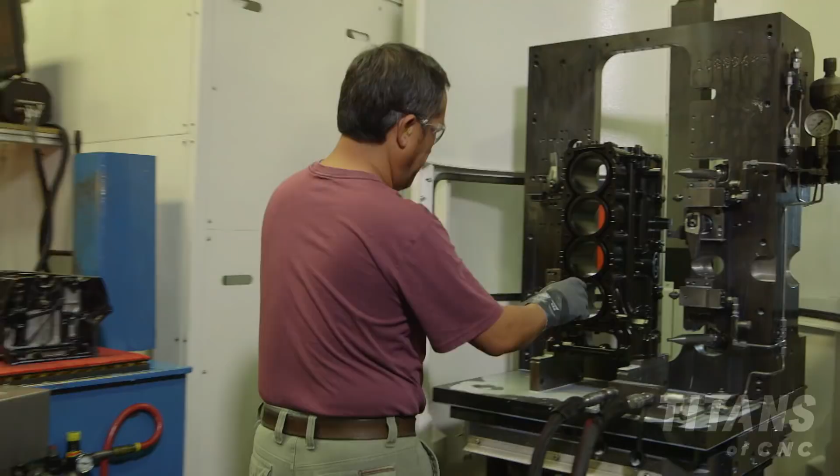Remember when I was talking about the genius of figuring out processes, ways to save time and money, and diving into automation so we can keep workers here making American products? We're looking at this horizontal line that Mercury Marine invested over $5 million in. You've got 6 horizontals, a railroad with the robot, and 24 pallets, with workers running around making it happen. Dan, you're the mastermind. Can you explain to the students how you utilize this software in relation to the floor?

Absolutely. This software allows me to simulate the entire process, the machines, the people, the material, everything that happens out there. I use it to help streamline the process, focus on productivity and efficiency, make sure our operators have the right amount of work content, and make sure our machines are producing parts efficiently to meet customer demand.

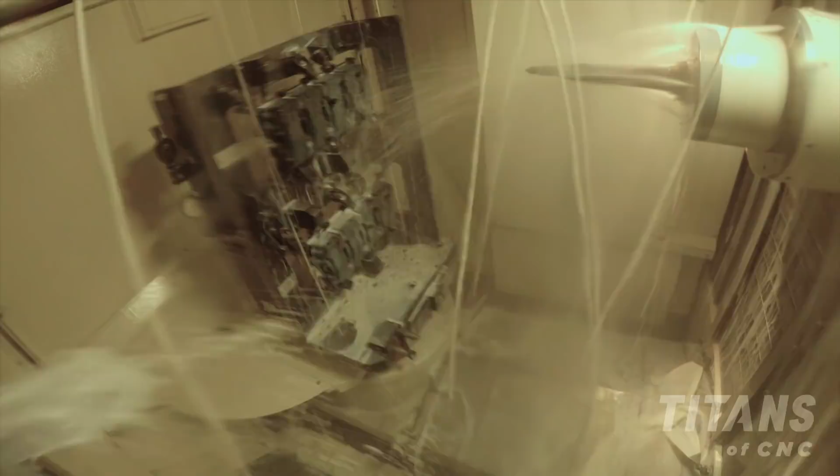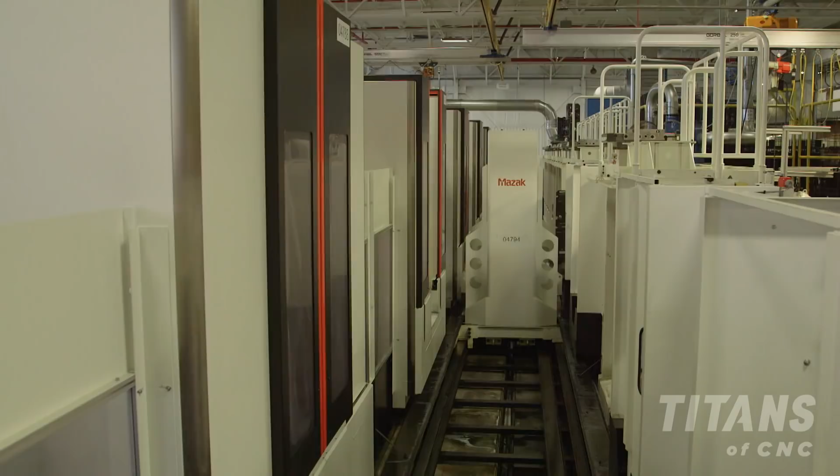Every pallet is like a vise standing up where you have a part attached to it, and you get creative in how to attach that part. That's where your head comes in. We load the pallets here, the robot grabs the pallet and takes it to the 6 huge horizontal CNC machines, similar to what you have at Eleva-Strum but horizontal instead of vertical. The spindle comes in and machines the part, which can rotate. When it's done, the robot grabs the pallet with the part on it and puts it back to change. You guys get it? It's awesome.

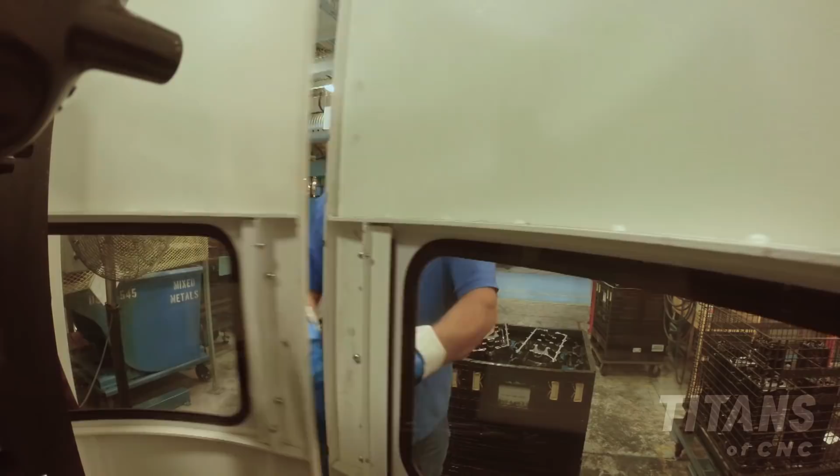So Jerry, that tells me you actually invest heavily in your workforce. Absolutely, Titan. Having equipment like this is only half the story. In order to keep this magnitude of equipment running, we need the right skill set. That's why it's so critical that you guys are learning that skill set.

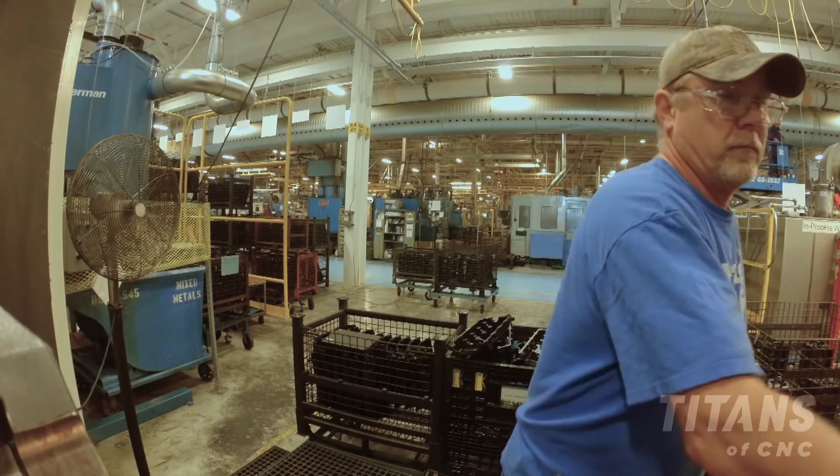6 machines, all running. You've got a few operators just putting the parts onto the pallets, and it runs 24 hours a day right here in America, and it's competitive worldwide.

The size of the machines just blew me away. Some of them were as big as my living room, maybe bigger. That was a shock to me. I thought all the robots and automation were really cool, and how one worker could be working in their own little cell running like 4 different parts at the same time.

Once they're done with the CNC operations, they go through a hone, a line bore, and a wash. Once through that process, they're ready for our customer, the assembly line. So the hone, line bore, and wash, is that the big robot over there I'm looking at? Yes, sir, fully automated.

Fully automated. Do you still have workers setting everything up? Absolutely, we still need people to run the CNC machines, change tools, and do all the critical inspections that are required, and program the robots.

Next on Titans: they were moving on their own, like they had a mind of their own. And man, you've got some huge CMMs in here. That's the guy.

This guy's a fake. In this episode, we went back to Wisconsin to Cardinal Manufacturing, Eleva-Strum High School. We took these kids down to Mercury Marine, 3 million square feet of massive manufacturing, opened their eyes to what's possible. And now we're going to a different place.

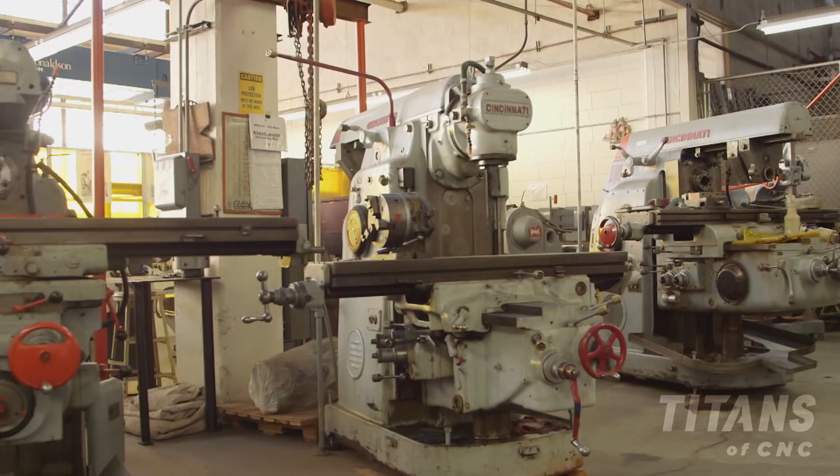I'm walking into this machine shop and it is absolutely awesome. You have all these machines, some of them 70 years old. See some of these magazines, they're just on the counter and they say 1947.

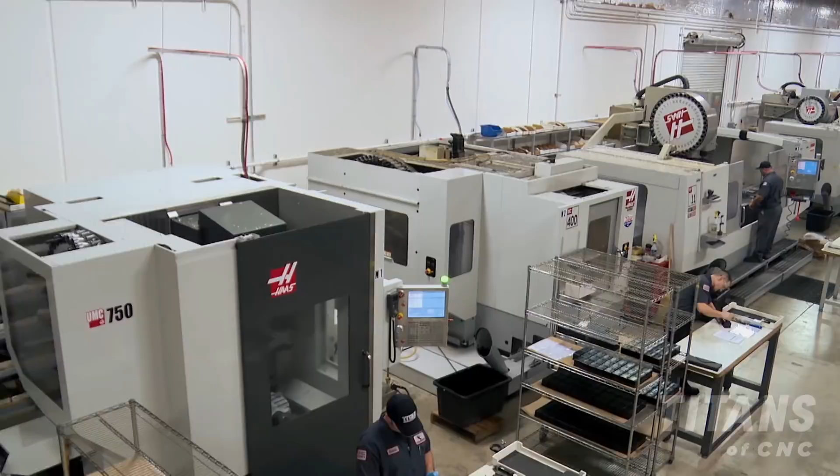If I'm gonna help design this thing, make this happen, we need to wipe the slate clean. We're gonna bring in new machines, CNC technology. We're gonna bring in advanced CAD/CAM systems. I'm gonna teach them to produce a part from nothing. And this is a 3-axis machine, and then you go up to 4-axis, 5-axis.

I'm walking the floor with the team here at San Quentin Prison. We need to run this manufacturing plant inside San Quentin just like we run outside machine shops. So they can go from this one into a regular job on the outside, and it's just perfect.

This program is going to have a great reputation. They're gonna know, and it's gonna be a symbol for what can be done in prisons. And when you walk out, it's not gonna be like that guy's a convict, that guy's from this program. He's like going after life, he did really good, and let's get him a job. Let's partner with some different companies that get these guys jobs. That's what it's about.

They understand that I've been where they're at. Just seeing this line of guys and they want to shake my hand and give me a hug. Just the emotions, the love. They see me as hope because I'm showing them the other side of what can happen when you get out. They want to shake my hand because they know that I'm the real deal. And because of this relationship right here, I know I'm exactly where I'm supposed to be.